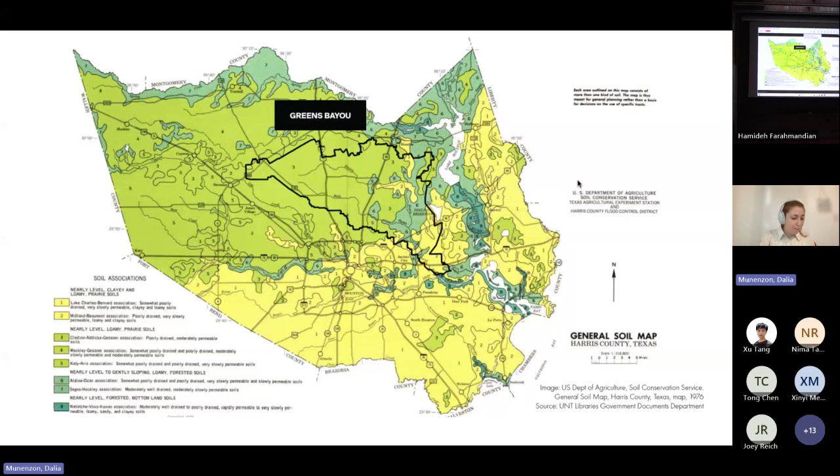So within each flood event in recent years, when we're looking at this large system of bayous and watersheds, we constructed a new layer of water management: detention ponds, diversion tunnels, drainage ditches, all entangled within this urban infrastructure.

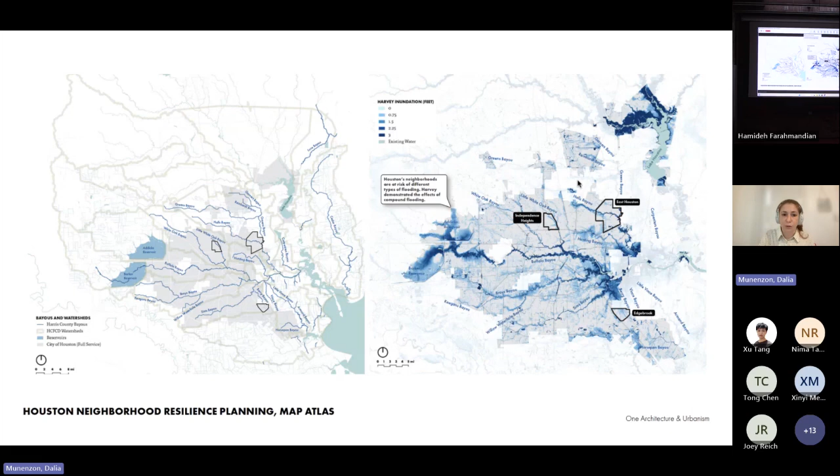This perpetual maintenance and expansion of complexity exacerbated climate risks for multiple reasons. When we try to contain water within this system of concrete banks, water moves faster, and it also doesn't collect sediment, so we're contributing to subsidence, to the sinking of soil. We're also not building new soil or fertilizing the banks of the floodplain.

And it happens especially in underserved communities.

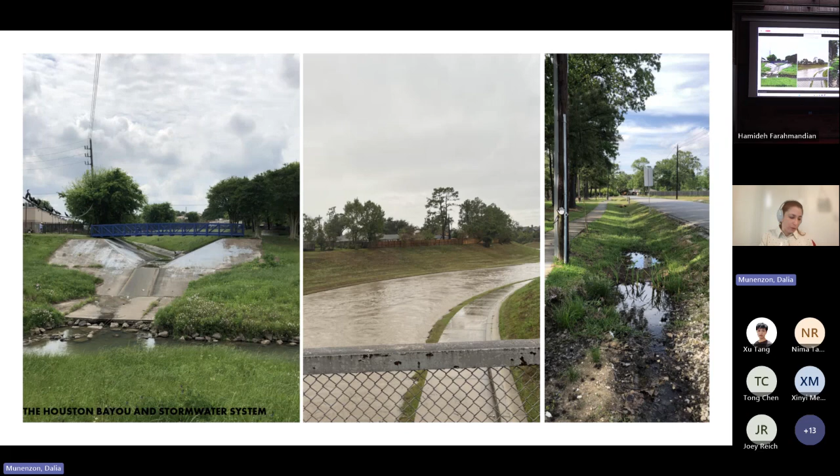So when we're trying to document this history of transformation and drainage, and how we try to rein in the floodplain, we are trying to uncover these histories that Professor Marcia Bjornerud was talking about, and see how the meanders of the bayou and the river used to be, and areas where they were filled or straightened, and how they have this continuous impact on the condition today.

But also, we're trying to investigate this fragile balance of the bayous and their flat surroundings, and understand how it was used before it became just a stormwater drainage ditch - how it was used as a valuable ecological space, how it was used as a public space, and how it functioned in service of water drainage and stormwater collection before it became an engineered concept.

So we decided to map this area within Northeast Houston. I don't know if you can see my cursor, but downtown is to the middle left here. This wiggly water pathway is the shipping channel. Houston is one of the largest ports in the US, and also a major oil production and distribution hub. So all of that area along the watershed has multiple refineries, connected to the fact that there's a lot of air pollution and additional industrial environmental challenges for the people that reside there.

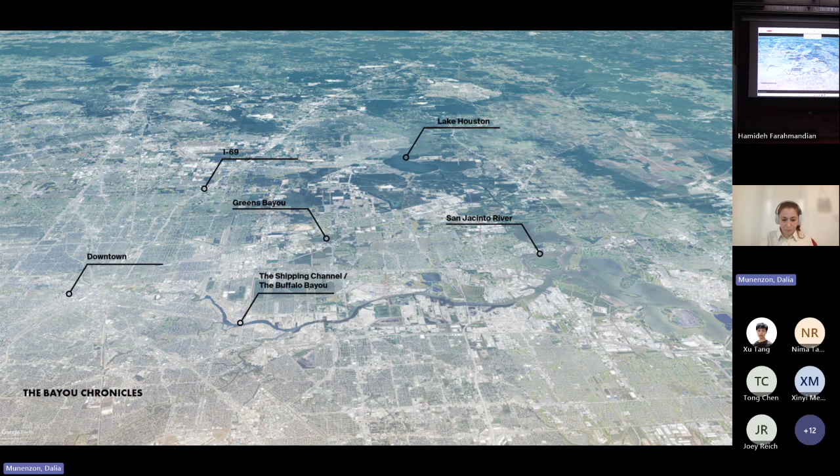And when we zoom in and see the transformation, urbanization happened very quickly in recent years. You might have heard anecdotes about Houston as the city that has no zoning. It's one of the only cities in the US that really doesn't have specific zoning laws. It has deeds, and it has different layers of management and control.

Some of these are framed by the communities. The communities have the ability to define how their neighborhoods are developed, but it's kind of up to them to initiate it. And therefore, it contributes to this developer-driven landscape.

And we found the oldest map of the city of Houston. I think being in the UK, you might find this amusing, especially in Cambridge - the oldest topographical map was from 1916, which is a little bit over 100 years ago.

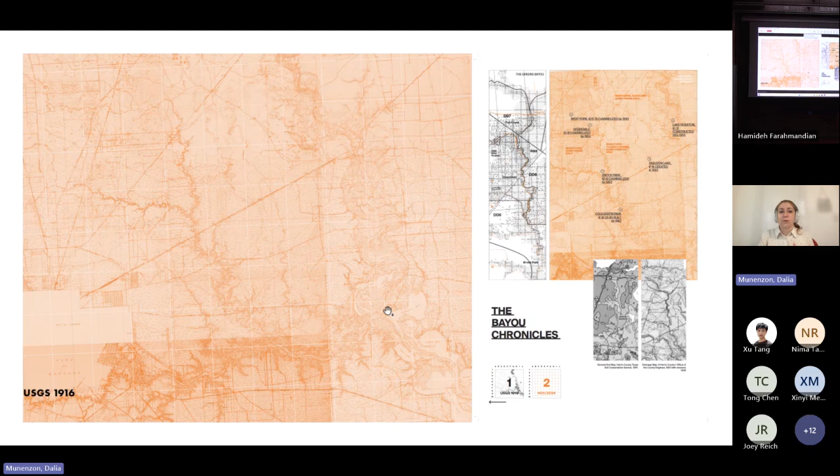And to the right is the meanders of the San Jacinto River, which a few years later, in the '50s, becomes a dammed lake. And slowly, what drove the transformation and the hydrological system that started to manage it is not essentially the landscape, but property ownership.

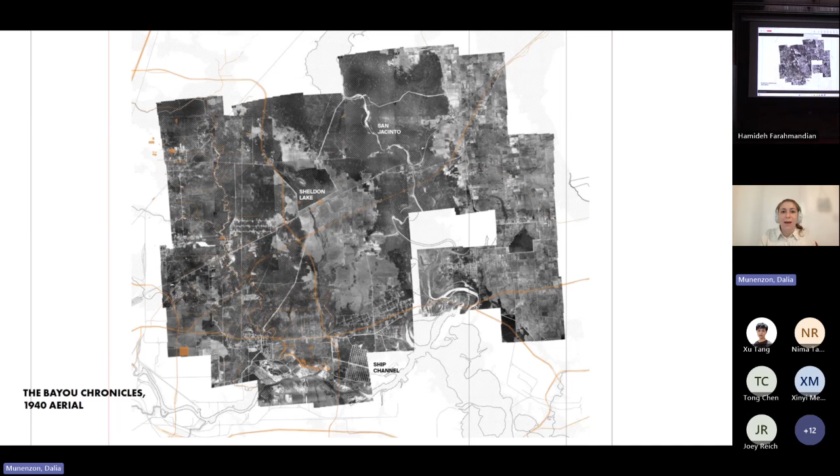Once people started purchasing lots and practicing agriculture in order to turn swampland into valuable land, people essentially drained them. And the drainage infrastructure was divided by ownership, therefore almost erasing the natural landscape of the prairie and the wetland. One of the things within this educational exercise we try to do is bring back and show how flat it is.

So we developed this 3D physical model of the 1916 map with an exaggerated elevation. We exaggerated by 3, so it will look very big. This whole area is around 25 kilometers by 25 kilometers, to start visualizing as an educational tool what it used to be before it was urbanized and developed, or at least from the last record we have.

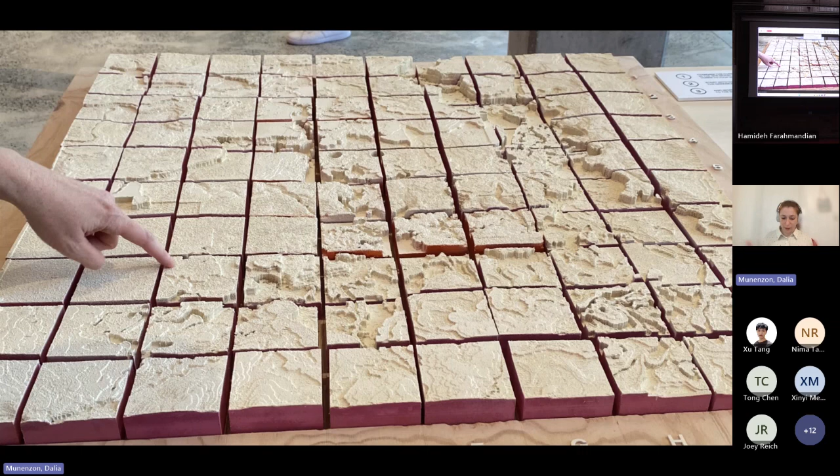Part of this exercise was also to look at the existing condition, the current condition, the orange boxes on the left that show us how it was changed. Visitors were able to exchange those cubes within the historic landscape from the 1916 map with the existing landscape and see how it was actually transformed.

So you can see this one cube right in front of me in this photo is the one with that landfill mound that is taller than most of the landscape and was completely man-made.

As we start testing this educational exercise of understanding the landscape, one of the things we're trying to communicate is this understanding that it always flooded, and it floods because it's flat, and that's what it's supposed to do. The way the landscape is managed doesn't really account for this understanding, but in order to create new environmental stewardship and consider new paradigms for living with water, we have to go back and build this narrative from the beginning.

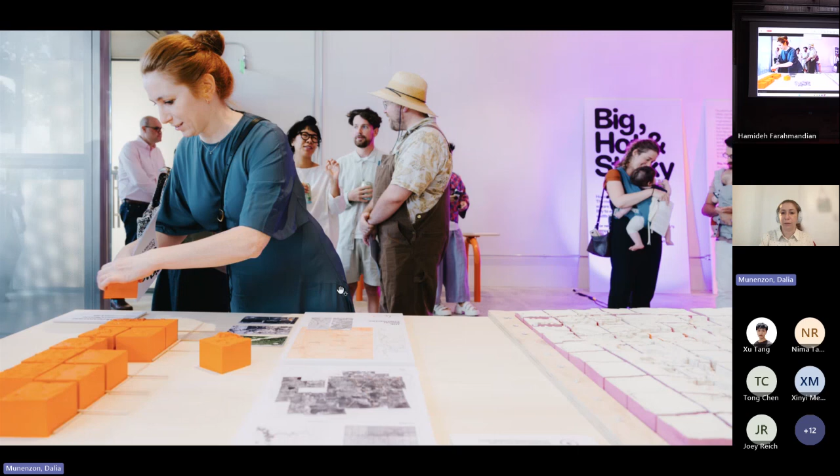The other aspect of temporal horizons when we're working with climate is this aspiration to create a narrative. Amitav Ghosh, the novelist, in his book The Great Derangement, talks a lot about how uncertainty is constructed within the way we tell stories in our society today, and how you always have this mundane, stable timeline, and then something highly improbable happens, which brings us this idea of uncertainty.

That's also how we analyze climate events. But if we actually look and observe the history and the landscape, we'll understand that some of these events are part of natural processes. They become more extreme because of how we designed our infrastructure system and where we choose to build. But not all of them are improbable, so the level of uncertainty diminishes a little once we start reevaluating how we look at it.

Within the context of urbanism and architecture, the lens of uncertainty requires expanding the role and perspective of the architect and designer to project multiple futures to the community and for the urban realm, and consider impacts and opportunities across scales, thinking about design as a process of inquiry for transformative opportunities.

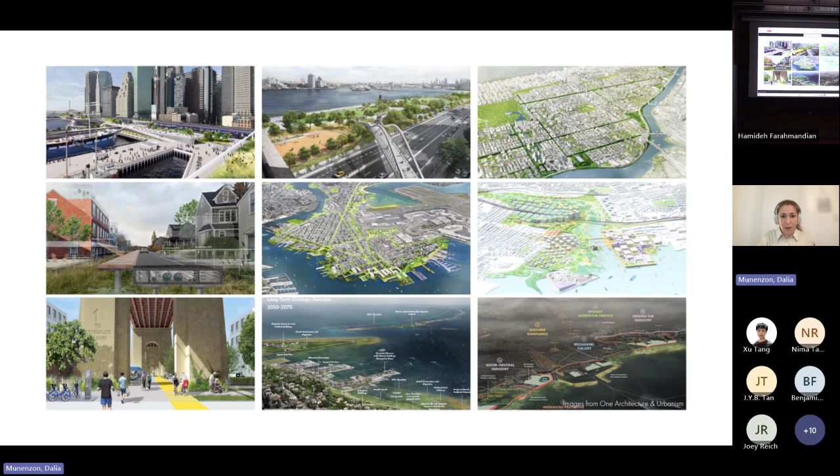The other element of many of these projects is working with the community. Once we start diving into vulnerabilities, many of the communities that are most vulnerable to climate impacts, at least in these projects across the US, were underserved communities. This is because of planning patterns, development patterns, but also their capacity to adapt and respond to climate events.

When we're thinking about whether it's low income communities that are more impacted and their ability to recover, or older people, children, or people with medical conditions that require them to have another layer of response, these are the vulnerabilities we're talking about.

And maximizing public benefit in many of these projects is the way we provide value. We're not thinking about climate adaptation projects within the urban realm as an infrastructure project, but it's an urban kind of placemaking approach that also serves as infrastructure.

And the important emphasis on this placemaking and co-benefit for the communities, specifically because, at least within the context of the US, we'll need to justify the funding for it. And if it's public funding, it's always better to have the buy-in, but also better to support the needs of the communities, because to make these projects sustainable for the long term, they will need to be the stewards of that environment.

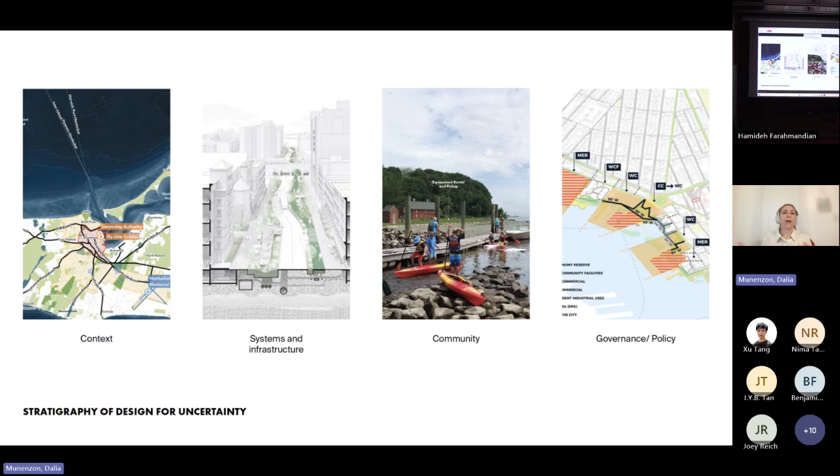And then systems and infrastructure, so everything that happens above surface, but also utilities that are buried underground and will need to be moved or transformed or even fail at an event of a climate emergency.

So the case for adaptation, let's say, is fairly straightforward, but I think especially after this morning's news, it's important to think how we can talk about it and how we can build the argument and the urgency for climate adaptation to a wider audience, even if we're not necessarily thinking about extreme projections of climate.

So when we're looking at this overview of timelines as defined by the recent IPCC report, but also shown throughout the years, we basically see that by 2050, we have, let's say, stability. And then the climate will become more extreme with more frequent extreme events towards 2100.

So if we're thinking about planning and long-term scenarios, it gives us 50 years to figure out what we're doing and how we respond to this within the urban realm. And I'm specifically talking about adaptation and leaving mitigation aside at this moment, because it's part of trying to make an argument that will work with different views of climate change.

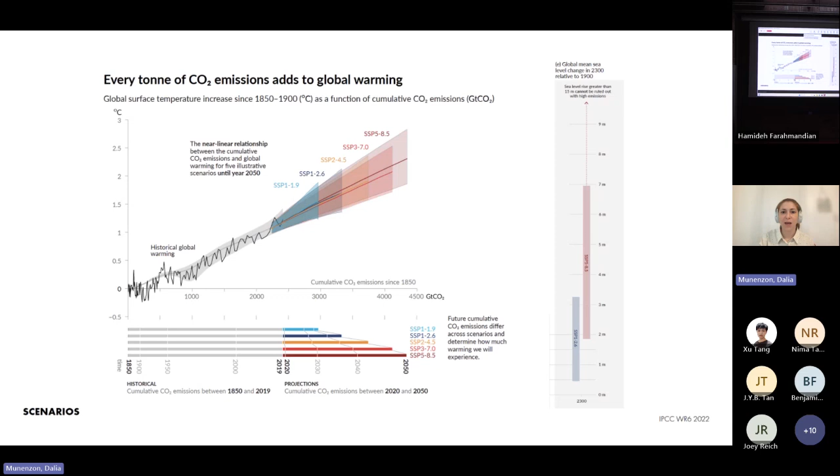So the political will, as we can see here, is important because we're relying on funding and the ability to adapt policies. But also we need to find a way to work around it, again, within this morning's context, and how we start adapting our environment, how we start driving the adaptation in the built environment in a way that doesn't necessarily rely on the top-down policy decisions of politicians.

And one of the arguments that Chakrabarty makes that I find very compelling is that we already know what the risk is. We already know enough. And we see climate events, we see these kinds of weather extremes that are transforming and impacting our cities.

In Houston, just in May and April, we had 3 consecutive storms. We had a tornado that was called a derecho that never happened here before. We had a hurricane, Beryl, and then several other storms that were very close to flooding in many areas. So we already see this happening.

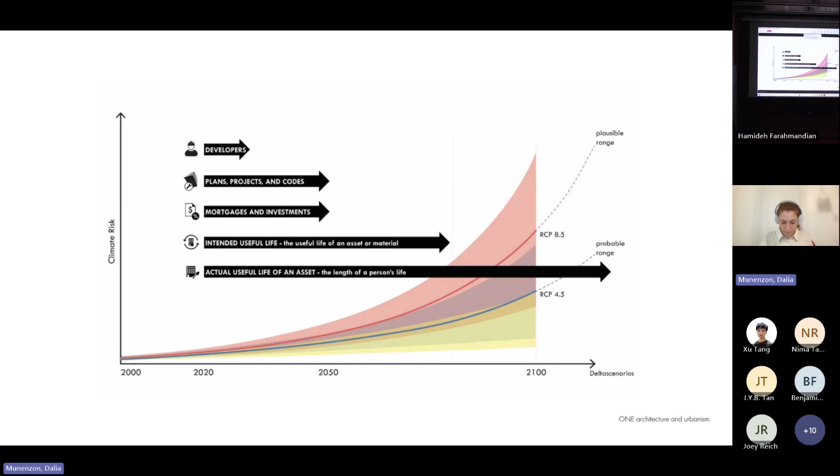Another part of this argument is research from Oliver Wing and his team that looks at what will be the impacts of climate on risk and equity by 2050. The interesting finding, in addition to proving once again that spatial inequity and greater risk to underserved communities is something we have to deal with, is that part of the increase in vulnerability is not necessarily due to the expansion of the floodplain, but because people will move and there will be more people residing within the urban floodplains.

This is within the floodplains we already know about, without even projecting sea level rise. Another study looking at Miami-Dade and Florida by Nadia Seeteram and her colleagues classifies population into four modes of mobility: stable, migrating, displaced, and trapped, where migrating and trapped are those directly exposed to climate. Over time, their analysis shows that the most vulnerable population, people who are trapped and unable to move out of areas of great risk, is going to increase.

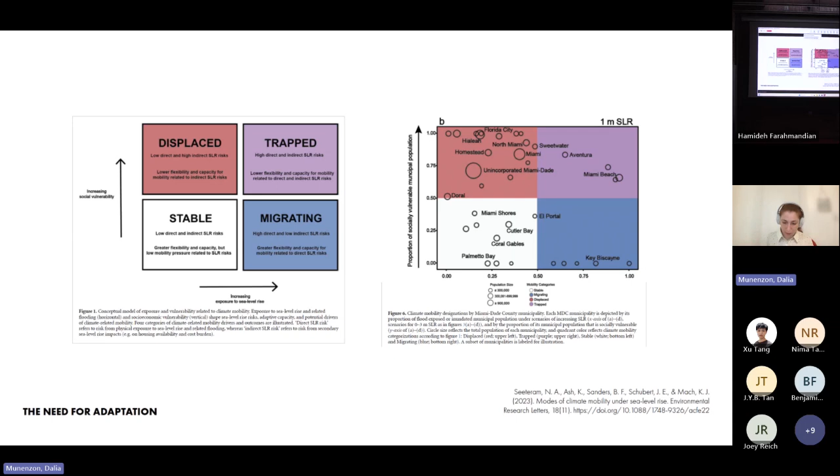So when we're looking at this, urban growth should be part of a comprehensive plan for a sustainable urban realm, addressing the somewhat invisible challenges of heat, storm water, and other elements, through a kind of complex systems method, because each climate impact correlates and exacerbates the others. We need to find a way to address all of them, and that's why we produce these most transformative elements of the urban realm.

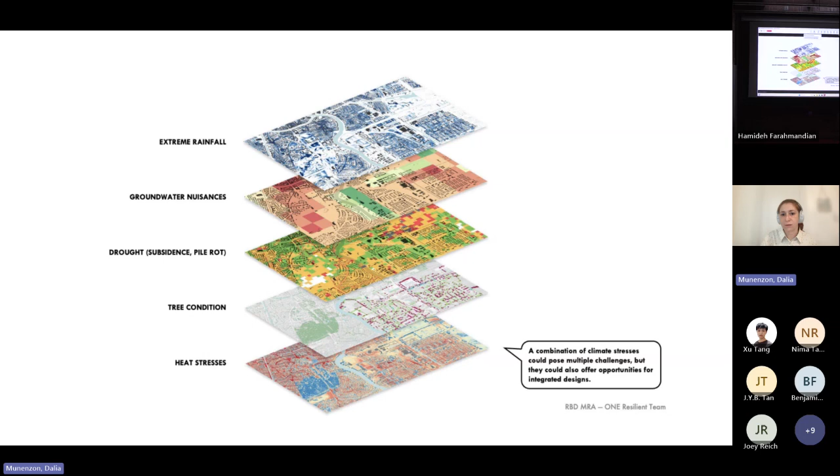I'll start with a quick overview of a Houston project that begins from a small-scale view of neighborhood development and local capacity building, not necessarily large projects. Within this context of how we work and develop climate adaptation, when we're trying not to rely too much on political will, we need to find a way to work within the capacity of communities.

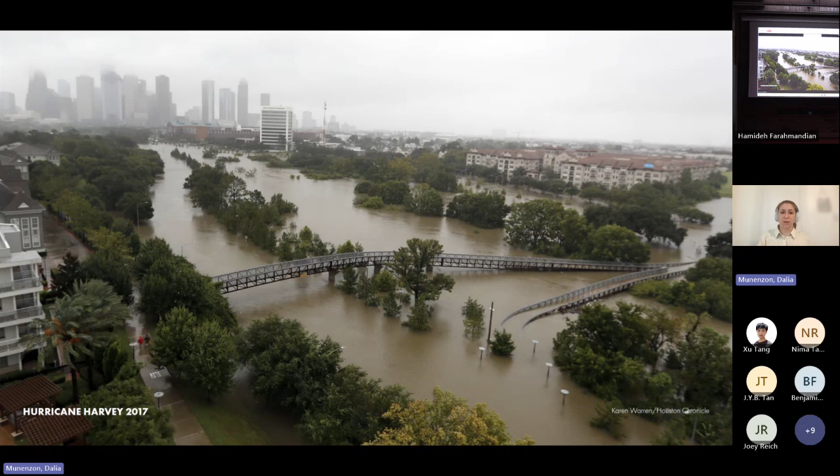The history of flooding in Houston, going back to the initial analysis, shows a flood almost every year since 1900. It hasn't changed. We just need to find a way to design the infrastructure system better, or develop a different approach that integrates ecological and nature-based solutions.

One thing we see a lot in Houston is that many of the eastern communities were annexed as Houston expanded into other neighborhoods. But when they annexed them, they didn't adapt their infrastructure, and often because of funding and different policies, they never modernized them. So communities that might not have proper drainage or proper infrastructure were connected back into the city but never served with appropriate public works services.

Unfortunately, because of the amount of flooding and climate events, many of these communities are resilient. We're saying this as a positive thing, but these communities also say we shouldn't have to be resilient—we should not have to live with this kind of repeat trauma of climate events. These communities develop very strong social bonds and strong community support systems, community-based organizations that are not always connected directly to the government.

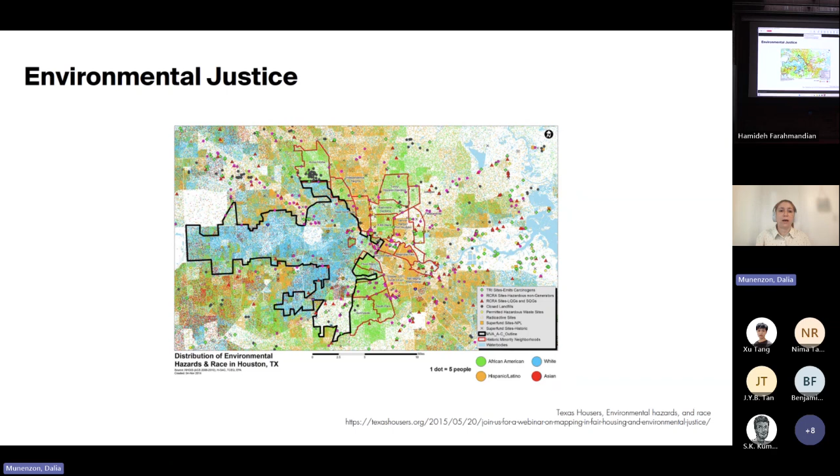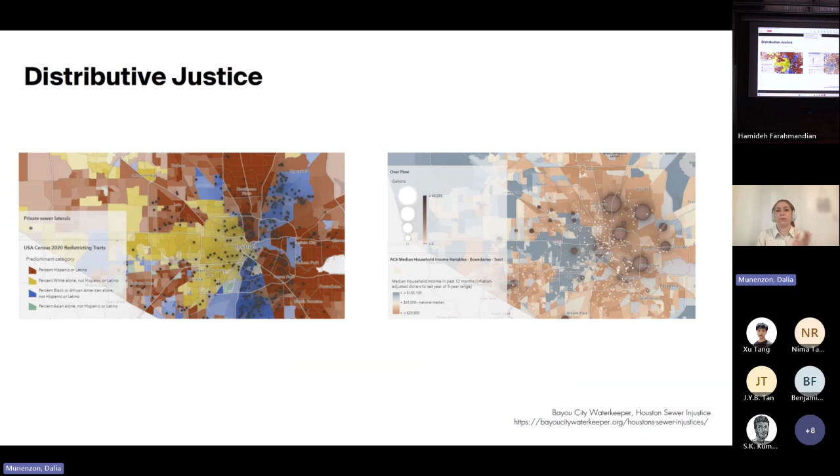In addition to lack of proper drainage or infrastructure, these communities are also experiencing multiple levels of health issues that are driven by exposure to these hazards. The distributive justice continues through multiple layers of infrastructure, whether it's sewer systems, how overflow is drained, and how everything works. It's an accumulation of historic processes of disinvestment.

It also contributes to peculiar jurisdiction questions. In many of these areas, you have open drain ditches on the street, where the jurisdiction of maintenance of these ditches is not under the city. It's actually under the responsibility of the property owner next to it. It creates a problem when we're talking about people who don't understand what they need to do, don't have time to deal with it—who really has time to deal with public infrastructure? The city doesn't have a routine maintenance process for some of these drainage systems.

What we see is that these areas flood more because of this lack of investment. Part of the project was to look at how neighborhood level investment and supporting governance mechanisms can build community capacity, and potentially rely on some of these community organizations to build adaptation strategies or find a way to rearrange some of the governance system within the city that will allow them access to some of the funding and public services.

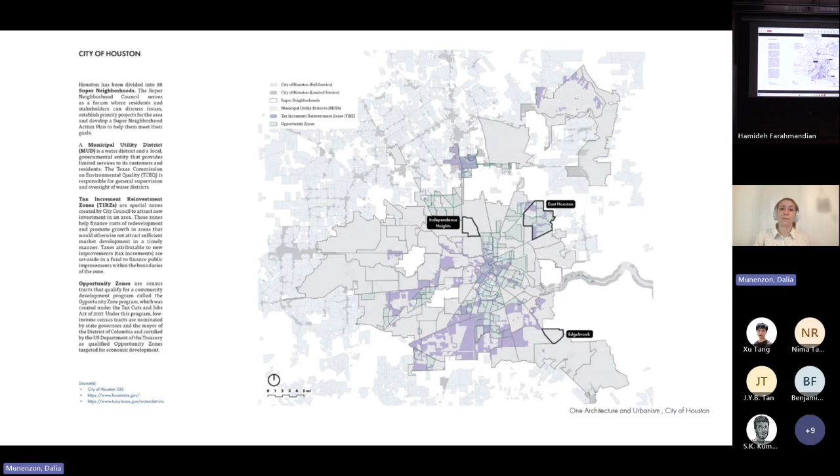This project was led by One Architecture and Urbanism and was initiated by the previous mayor and the planning department. It looks at three underserved neighborhoods with very different demographic compositions, and breaks it down into finding a way to create visions from spatial concepts that change in scale, to co-producing projects with these community organizations that can also support implementation in different ways, seeing how we can work within the existing governance tools of the city.

So if there's no zoning, how can a community limit gentrification or unwanted development, or how can they support maintenance and operation in the absence of the city's investment?

It all relies heavily on this idea of social infrastructure—places and facilities where the community can gather in order to build their own networks and linkages, and then slowly build their capacity to respond to risk. We're focusing on creating those places, creating the infrastructure for them, but also supporting the capacity building processes.

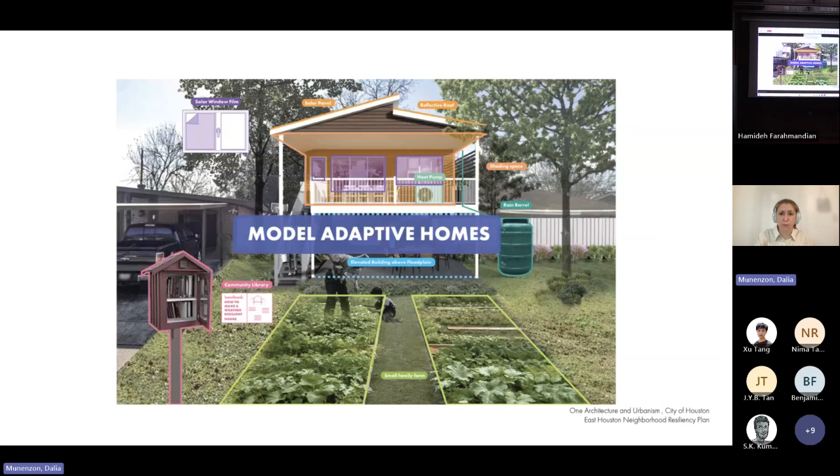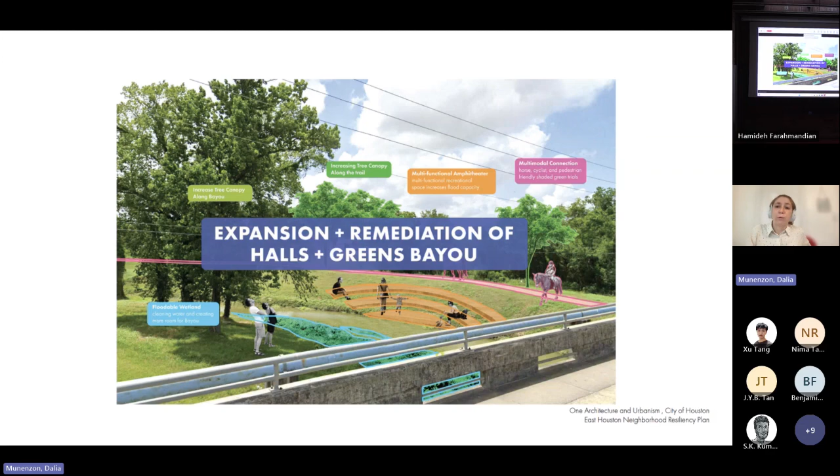The proposals are organized by scale, from adapting homes with different elements, to community facilities, streetscape improvements, and then larger projects focused on remediation that will require larger effort from a funding perspective and potentially philanthropic investment.

One of the things I was working on when analyzing this project from an academic perspective was essentially identifying the main challenges to implementation and co-production. We're looking at the scale of institutions that need to be involved in each one of these projects.

One of the things that kept coming back is the relationship between the communities and the local government. We see the need for institutional reforms, because while the Houston governance structure allows communities to have representatives within the city council and drive more change and action, it is still a very strong mayor governance, where at the end the mayor decides where the funding will go. So there is this ability and framework for communities to engage and contribute to change, but there's not always the space within the political realm.

I only have about 10 minutes left, I think.

So I'll try to run through other projects that look at this on a larger scale, and three anecdotes of how resiliency projects can be conceived and developed within the realm of the US and the different existing policies. So New York—it's a project that started in 2012 after Hurricane Sandy, and you've probably seen this in many different events.

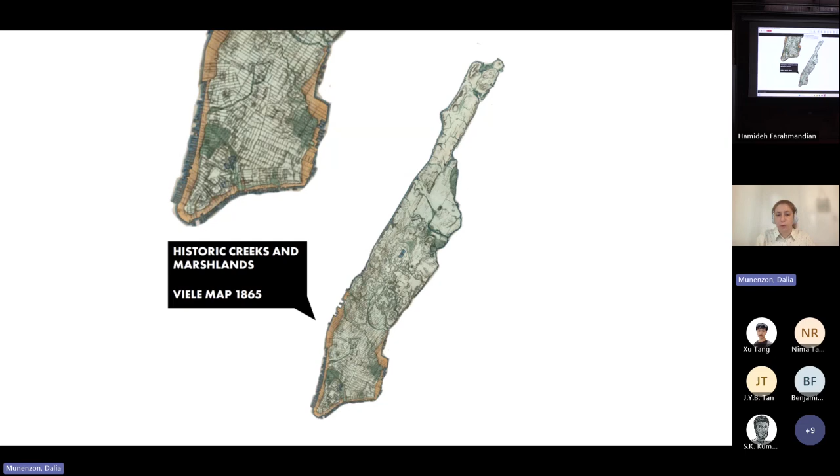Water always goes back to where it used to be, and water always goes to the lower point. Once we start seeing the flood maps, it sort of clicks—we understand how the hydrological landscape we see reflects the transformations we did when we built the ground in those cities.

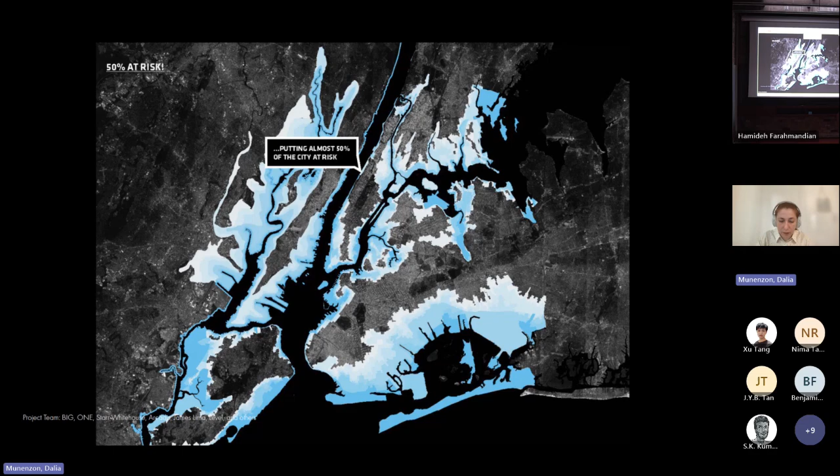Hurricane Sandy was extremely disruptive, and I think it was also a paradigm shift for the planning world, when we started thinking about adaptation as projects that work on co-benefits and multiple benefits for the community, not just infrastructure projects. It also goes back to this issue of social infrastructure, where the impact is mental on the communities, and affects their capacity to adapt and respond to those risks. So the social linkages are ingrained within this understanding of how we approach these projects.

So the project was meant to connect infrastructure with program—I'll run fast through this—where each of these elements responds to the neighborhoods adjacent to it, especially the idea of breaking it down into smaller pieces. This also allows us to reduce project risk, because once we have these smaller units, each one is managed specifically, and we can close each one of them so they don't break as a system.

When we're talking about the elevations of these things, this is the philosophical question of this project, because it was created and funded as part of a response to Sandy, to disaster. When it happened in 2012, and the project was initiated by 2014, the definition was that anything built had to start being built by 2021. Actually just this week the mayor's office, I think it was Public Works, showed how one of the first phases of the project was completed.

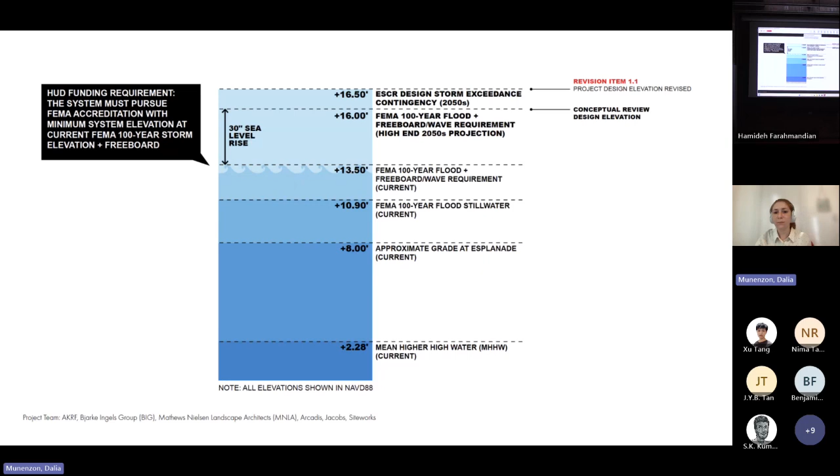The first project was implemented on this public land, on a public park. It's also protective of a very large area of public housing, which was part of the reason it was funded by the federal government.

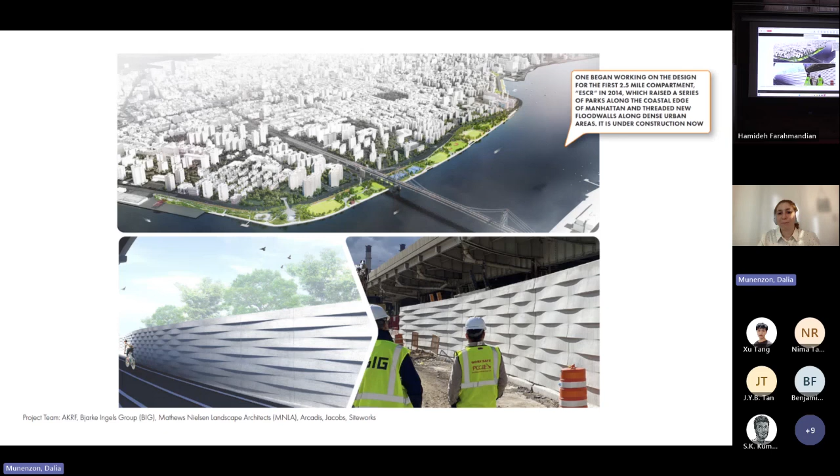And then the other philosophical question, if we're talking about co-benefit and it's a beautiful park and we want to connect it back to the community, at the end, because of limitations of space, it's still a wall, and it's still something to kind of see as a barrier, even though you can cross it in multiple locations.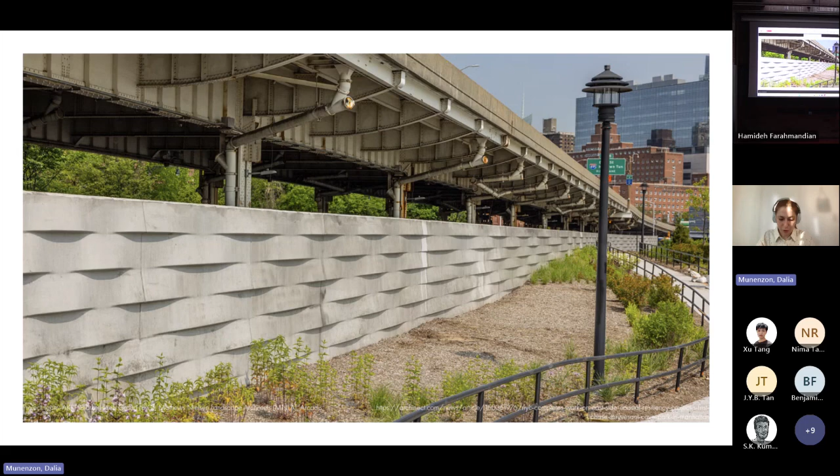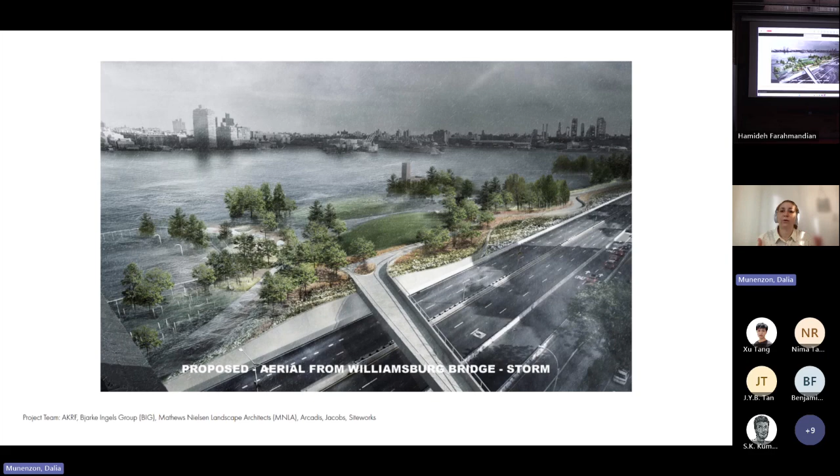The other interesting discussion that happened was whether or not the park should be flooded. We had some images talking about this floodable landscape. However, the city in charge of managing the park was not as interested in trying to recover it after every flood, and asked to change the design in order to have the whole park above the flood elevation, which also changed the way it's being constructed. This moment in time and how much time it will take to construct, and the disruption to the FDR highway that is there, was part of what was prescribed in the design.

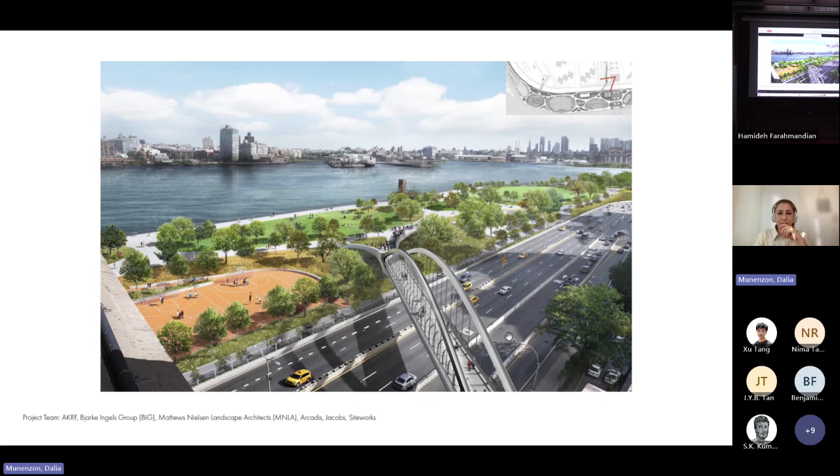So we're thinking of political decisions within this very narrow time frame, let's say the 5 years of construction, that are impacting something that will be in place for probably 100 years. So it obviously caused a major outrage, and then how we can ground this in public benefit.

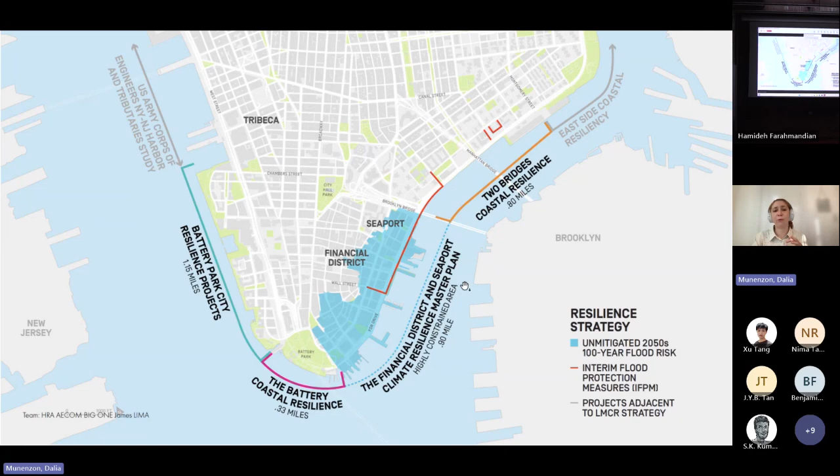The other aspect of this project was the longer term areas that didn't have as much funding. The city and the team were able to propose a longer term planning effort because there was not enough space to develop a similar system. Essentially, this allowed the team to look at a larger array of climate impacts and rethink the urban environment from a comprehensive perspective, from temperature to coastal storms, for a longer term.

Thinking about this cross section of climate impacts, groundwater level rising, tidal inundation, and all of the extremes might also impact the energy system.

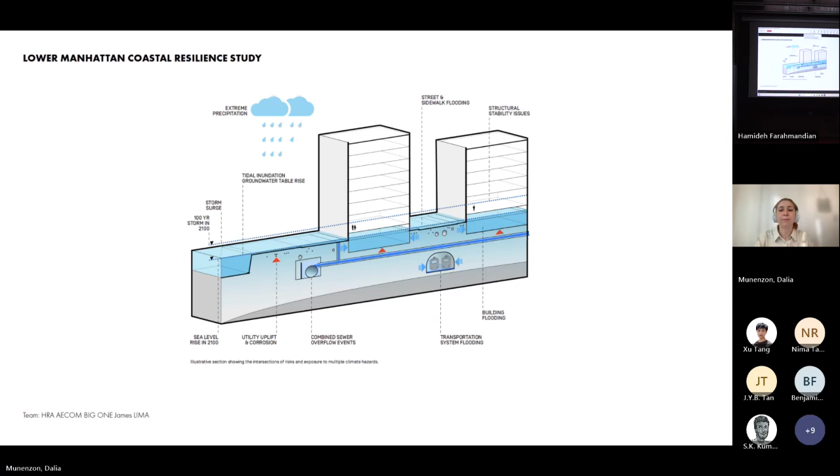So basically, the team built on this kind of toolkit of options at the scale of interventions, from buildings, streets, and utilities, to outboard and the edge of the water. The issue with the edge of the water is that it's often the simplest solution. We create a beautiful park at the edge, we build new land. We don't have any utilities and challenges because everything is new. And we solve everything in theory.

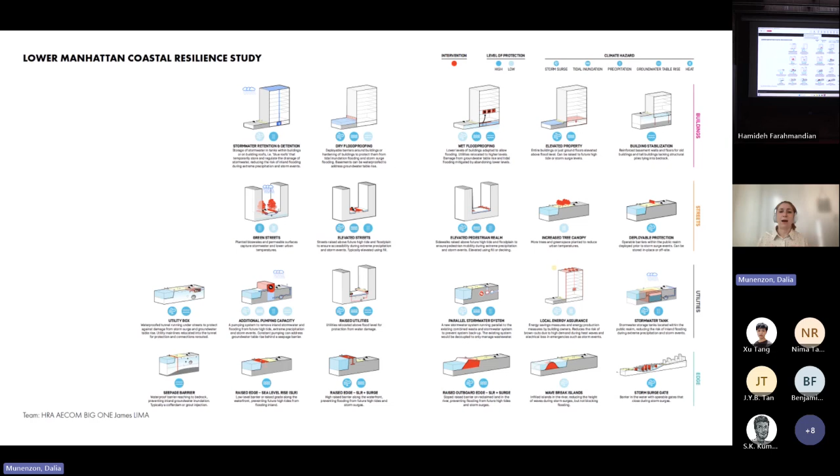However, the main challenges with this proposal are: one, the policy of the Clean Water Act and construction in wetlands limits what we can build, and makes it more expensive, adding to the timeline of how many policy changes will need to be done. At the same time, we need to have a better long-term perspective because we expanded the city by building new land, and now we're building more new land. So how do we justify this?

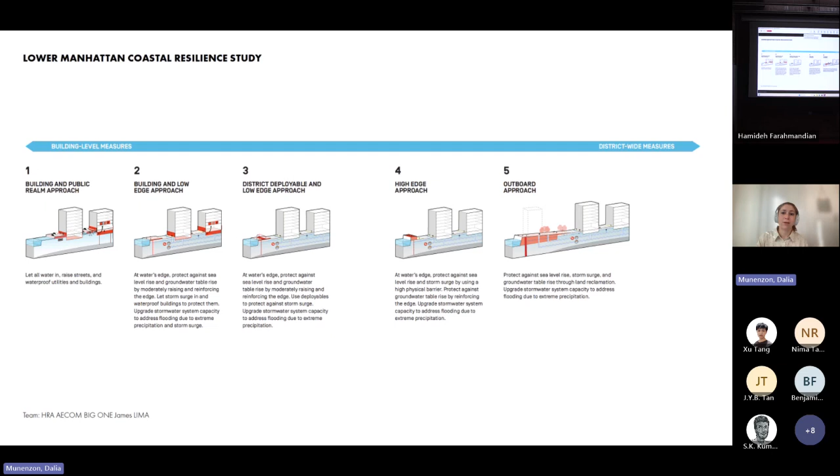And the option of the toolkit is to propose to the city, okay, here are the risks, try to respond to as many of them as we can. The building and public realm approach is fast and easy - you come to a property owner, they address their building, and they repair and adapt to future climate. As we expand and scale into the public realm, we protect more people, but we expand the timeline and have to coordinate with more people, which limits the project's success, or at least challenges it. So we need to be able to manage these different scenarios.

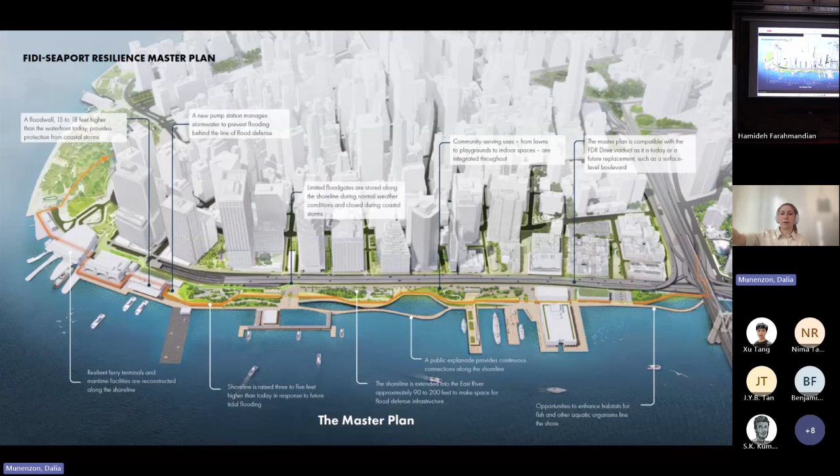Essentially, what happened after this proposal was that the previous mayor of New York decided to develop this kind of outboard new land solution to protect the area. There is a conceptual design master plan that looks at it, proposes this beautiful park that also approaches these multiple risks and responds to the needs of the community and to this elevation change. And with whatever we design, we need to go up and down in order to get to the water. This goes back to this question.

Okay, so what does this mean? So we designed something for 2100, but assuming... the main assumption here is that we have to protect the financial district, we have to protect New York, and what do we do next? In 2100, when things become worse or more extreme, what does it mean for the future? What can be the better long-term solution?

And whether the philosophical question of protecting everything is even what needs to be done.

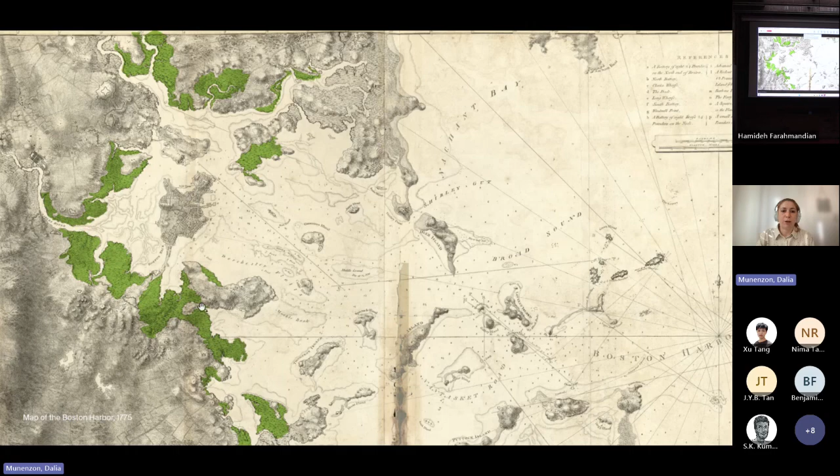This was Boston when the British arrived, a series of islands, and the green areas are marshes. Part of the city building process included the reclamation of multiple territories.

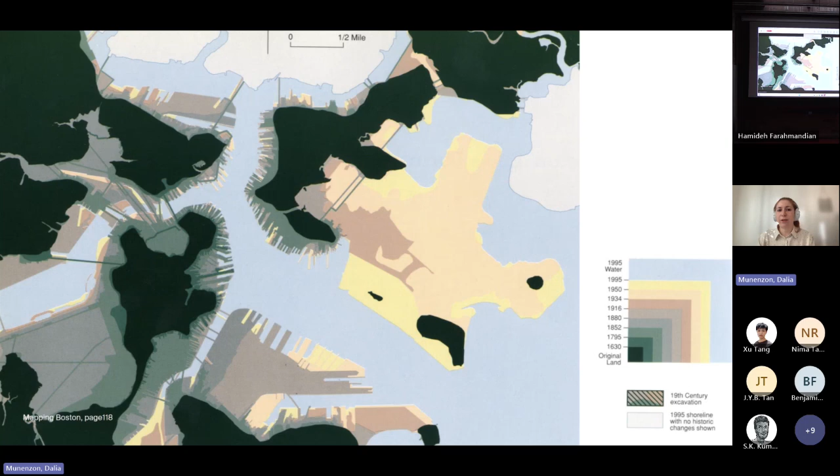Similar to the same narrative we've been building from the beginning, many of these historically reclaimed areas are the same areas within the floodplain. So again, water wants to go where it used to be.

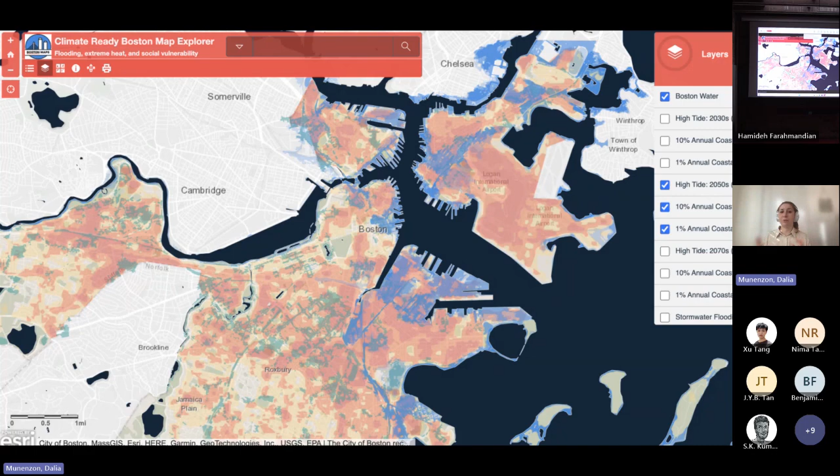Boston also reclaimed those areas with clay soil, which creates very impermeable surfaces.

The vision the mayor proposed was essentially creating this green band with co-benefits—a beautiful green park wrapping around 47 miles of Boston's coastline, allowing public access based on different communities and their needs to the waterfront.

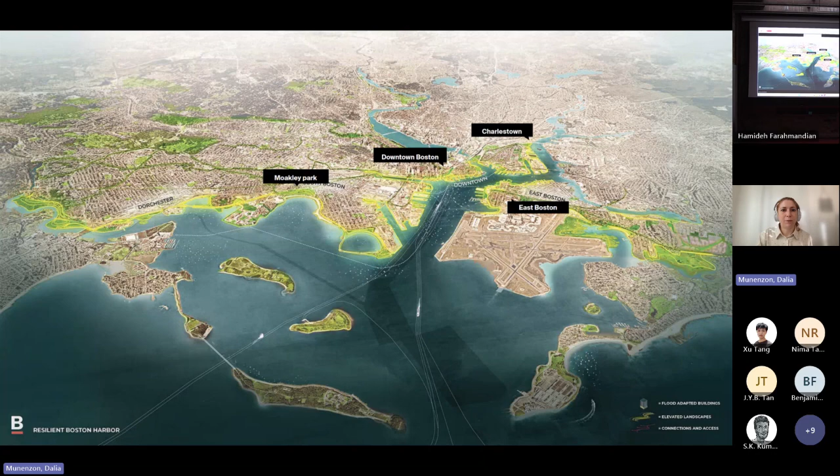Obviously it will need to be adjusted based on the landscape. However, the question is how long will it take to complete a project like that if we're trying to protect and elevate 47 miles of coast?

They broke it down into smaller, neighborhood-based projects, starting with the most vulnerable in East Boston and downtown, which has probably the higher value real estate, and the historic core that is the North End. The concept was: how do we create public space that pulls everything together while also providing protection?

When looking at the flood map, what's interesting about Boston is that Massachusetts and Boston were able to commission their own flood maps. In the US, FEMA's governmental flood and risk maps tied to insurance are historical—they represent past events and are unable to project into the future or show risk with sea level rise.

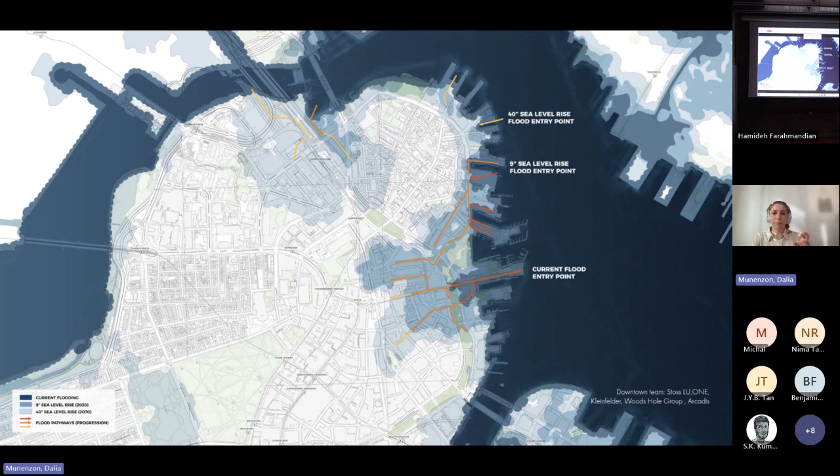Massachusetts hired Woods Hole Group, a research team able to model different projections with different probabilities for sea level rise and how water will move. This allowed the design team a detailed view of how water will progress into the urban realm—these arrows show at different time frames and sea elevations where water will go, letting us phase the project by solving the current flood entry point and building out to protect a larger area.

And the challenges that were identified—one is ownership.

So most of the properties at the coast, at the waterfront, are privately owned. So it means that if we want to do any kind of project that is comprehensive, connects everything together, and is managed and paid by the city, we'll need to find a way to negotiate with property owners and find a way to work with everyone. So you need to bring a lot of people to the table to make this happen.

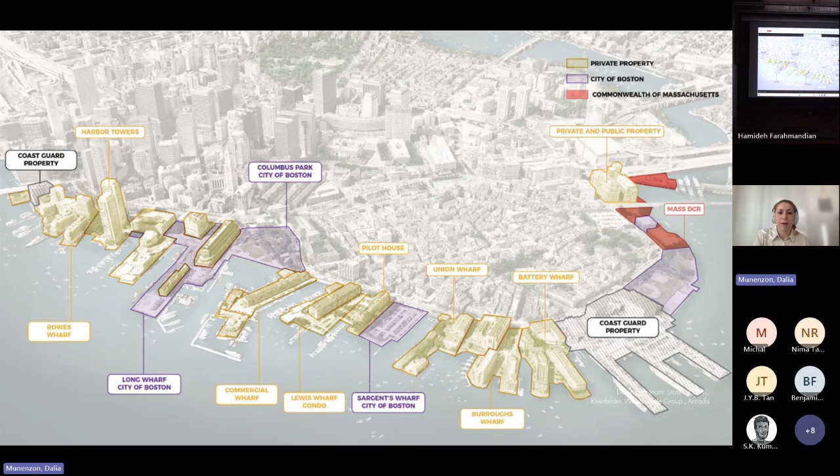The other level of complexity is the subsurface. So there's the Big Dig, if you might have heard. That's a subsurface tunnel that was constructed over the extent of about 20 years to bury a highway. And then the other layer is this kind of unstable reclaimed soil that was built on stilts and clay and has to have access to groundwater.

So whatever we build that blocks the subsurface soil from access to groundwater and the bay will create subsidence and sinking from the perspective of the soil.

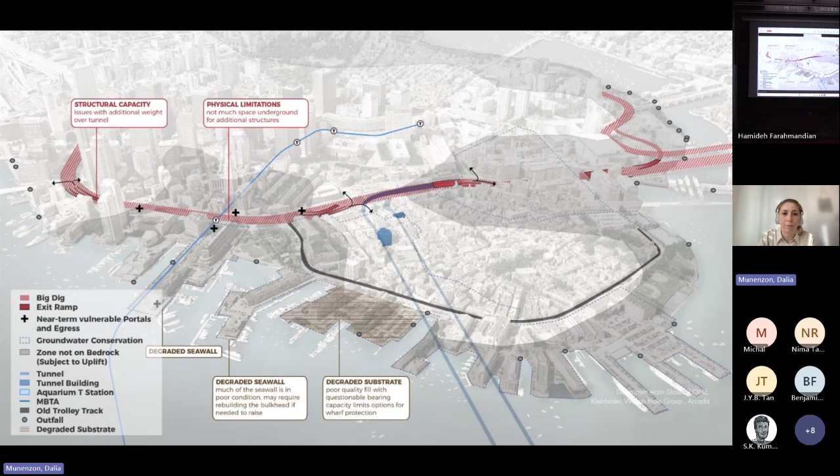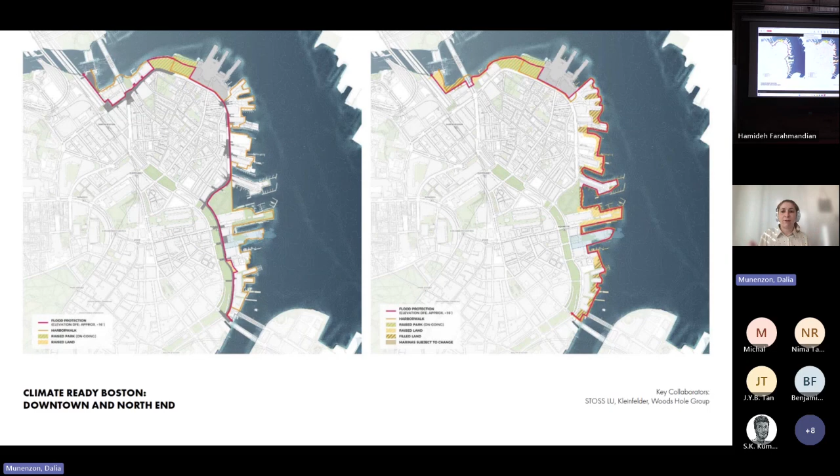So the approaches that were brought to the community were like, okay, the left option is one by land. We take the public right of way, we take what's city owned, and we have this kind of long protective system that might need to be stopped in different areas so people could cross into the water. And that way we avoid private property. Or something that goes by the sea and then brings everything together, but will take a long time to develop.

One of the lessons from the construction of the Big Dig was that there wasn't a lot of public participation in the process, even though essentially at the end the project is what we have now. The Rose Fitzgerald Kennedy Greenway is positively viewed by the residents of the city. Um, the project itself was viewed as corrupt, and people were very discouraged by the time it took to construct it and by the cost of it. That ended up being $20 billion.

So the approach here looks at the private property with a different lens, saying that, okay, we need to provide them options. And the toolkit here is how we can provide multiple options to mix and match, to increase the ability to build this project.

One is kind of like, if someone wants to opt out and not be within this protective system, we can build the protective system behind them and connect them back to utilities. Or we can have a low impact public walkway system that also relies on this Massachusetts policy that requires a 3 meter wide pathway at the edges of waterfront properties. Or we can do something that will add new land, reclaim land, and create public space around these properties.

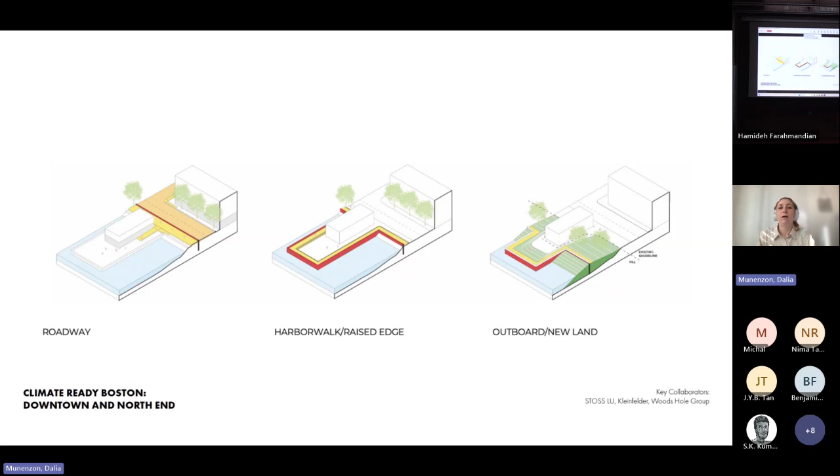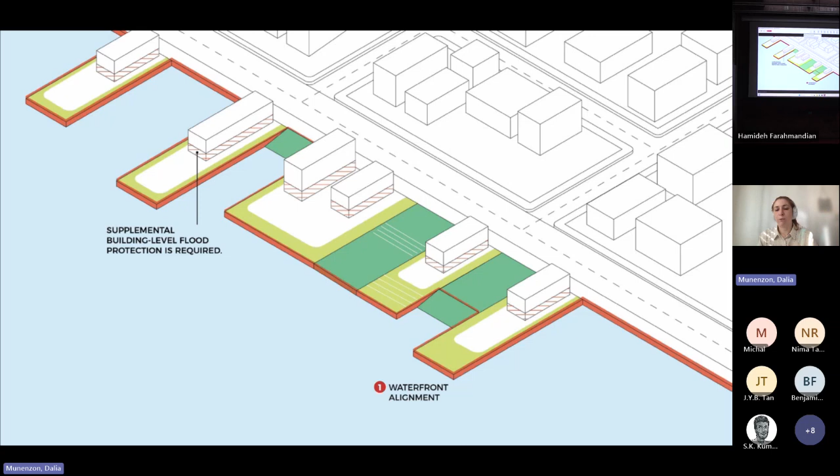And we need to anticipate the different scenarios and alignments and how it might happen, how people will come together, what will make them come together. Do we need to establish a specific agency or city authority to make them work together, or do we need to start providing incentives for some of these properties?

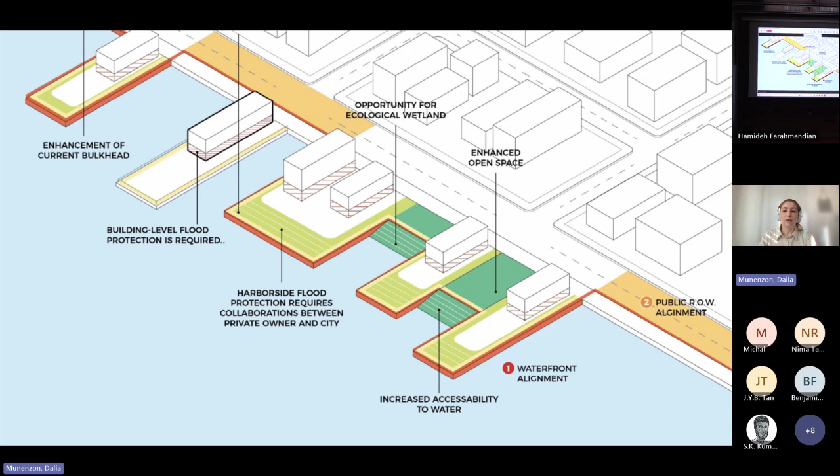And how we can build on, how we can add new land, with the understanding that there's a lot of policies involved that are limiting us from doing so, and we need to extend the timeline. So essentially these implementation pathways are packaged within the timeline of, okay, what are all the possibilities and how long it will take, and where is the cutoff where we have to do something for each one of these areas based on our flood map.

So within this concept of urban commons, how we can manage and operate, what does it mean? Is it on private land? Is it on public land? How do we start thinking about these spaces? And how do we start thinking about building the project even before we incorporate the climate risk and the long-term projection?

So I'll jump this project and finish at that. I think one of the takeaways I would like you guys to have from this talk is that, while we think of these strategies to transform the built environment to the shifting climate and expanding seas, how do we communicate the level of risk and the challenges, and how we start layering all of the elements that need to be managed, and how we make it more accessible to a wider audience of the community, but also how we reflect on the past in order to try to develop new concepts of adaptation. Okay, thank you.